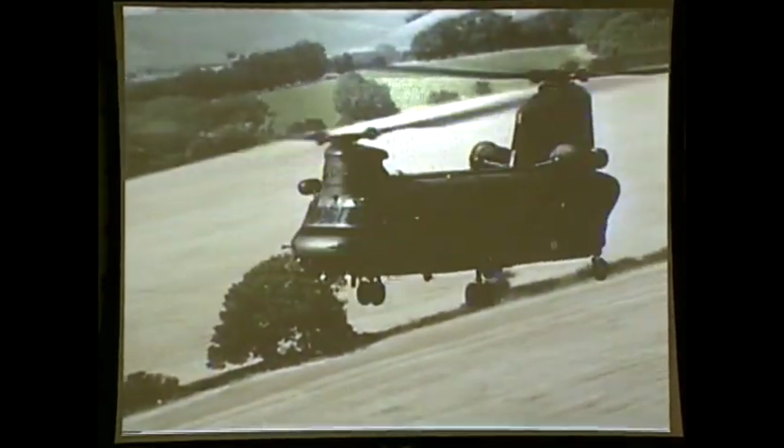Chinook is the world's most efficient, reliable, and versatile heavy-lift helicopter. It routinely does what other helicopters cannot. The Chinook flies with larger and heavier loads in demanding conditions that keep other helicopters on the ground.

The secret is in the Chinook's tandem rotor design, with its efficient size and system capabilities that can move more payload faster at a more economical rate than any other rotorcraft, even in high elevations, turbulent winds, and hot and humid climates. With its stabilizing sling load system that utilizes up to 3 external hooks, the Boeing Chinook may move a vast array of large and awkward loads to critical locations at airspeeds up to 130 knots.

A digitized cockpit management system, vibration reduction technology, and extended range fuel systems enable crews to fly complex missions with ease. Additional features that allow for water landing, operation in desert environments, and search and rescue extend the Chinook's already long list of mission capabilities. Long a mainstay of the United States Army, with a fleet of more than 400 CH-47s, Chinooks also serve more than a dozen other international military forces as their transport helicopter of choice.

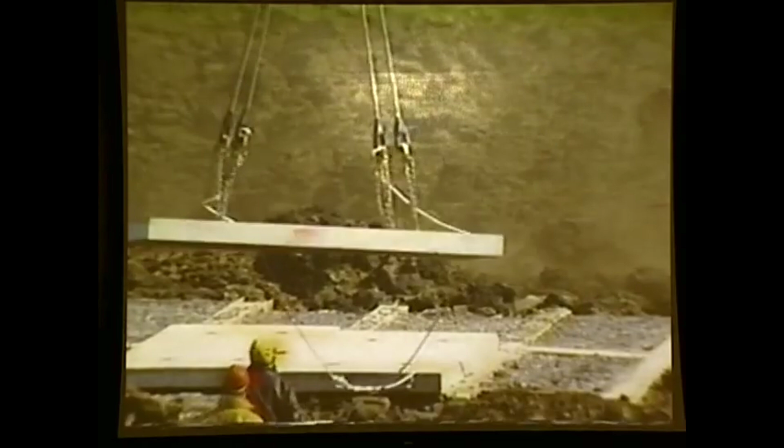In the mid-1990s, television news viewers watched a Chinook lift needed equipment into the flood-ravaged Des Moines, Iowa water plant to return that vital facility to operation for 250,000 residents. Chinooks from California rescued stranded mountain climbers on Mount Whitney, an event documented on the TV show Rescue 911. 3 cross-country skiers stranded by an avalanche near Aspen, Colorado, owe their lives to a Chinook crew. No one else could have reached the skiers and saved them from brutal cold and sure death. A Pennsylvania Chinook lifted a bridge into a state park, saving wetlands from damage by trucks.

Throughout a winter night in 1996, when no one else could fly, 4 Pennsylvania Chinooks flew in sub-freezing temperatures and blinding snow, completing heroic rescue missions to save 65 people from raging winter floodwaters that devastated small towns near Wilkes-Barre, Pennsylvania.

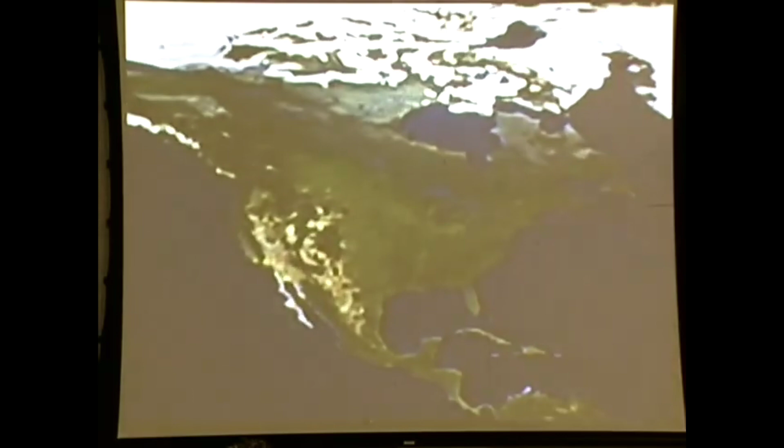Halfway across the globe, the flooding Sava River stymied U.S. Army engineers tasked with building a pontoon bridge for NATO peacekeeping forces moving to Bosnia. The engineers called for help from 4 Army Chinooks, which completed the longest pontoon bridge assembly since World War II in just 2 days. Through a record-breaking fire season in 2000, commercial and National Guard Chinooks fought dozens of blazes

throughout the U.S., dropping millions of gallons of water and retardant. A Chinook can drop up to 3,000 gallons of water or retardant mix, more than most fixed-wing aircraft, with pinpoint accuracy even in 45-knot crosswinds on the deadliest infernos and return with another load in minutes, unlike converted prop-driven bombers, seaplanes, and transports that may spend valuable hours returning to staging areas many miles from the fire line to refill

their water tanks. Chinooks perform life-saving missions lifting food, water, and building supplies into Miami, Florida after Hurricane Andrew, when storm devastation made roads impassable and survivors might have starved. The U.S. Army's lifting capabilities are not, however, limited to emergencies in the United States. U.S. Army Chinooks carried tons of food, water, medicine, and clothing to save thousands of lives after Hurricane Mitch devastated several nations in Central America.

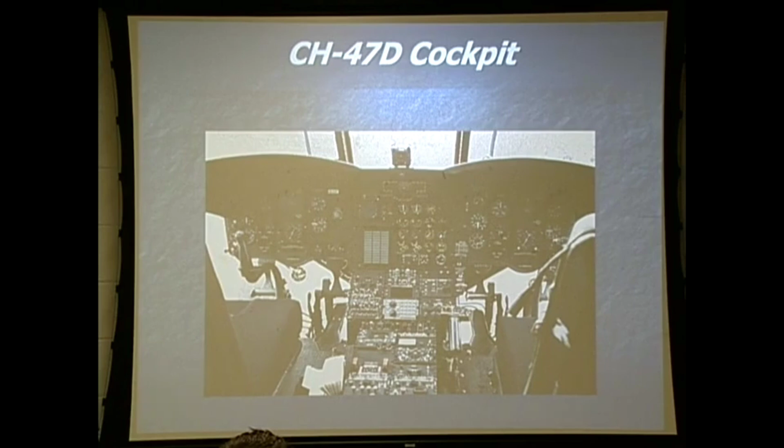The new guys, when you get into this new cockpit, be aware that one of you needs to be looking inside here and seeing what's going on, and at least one set of eyes need to be on the outside. It's too easy for everybody to look at this new equipment on the inside and forget where you're flying and fly into something. And here's what we're going to, the F model. And there's the cockpit for the F model. This is where we're going.

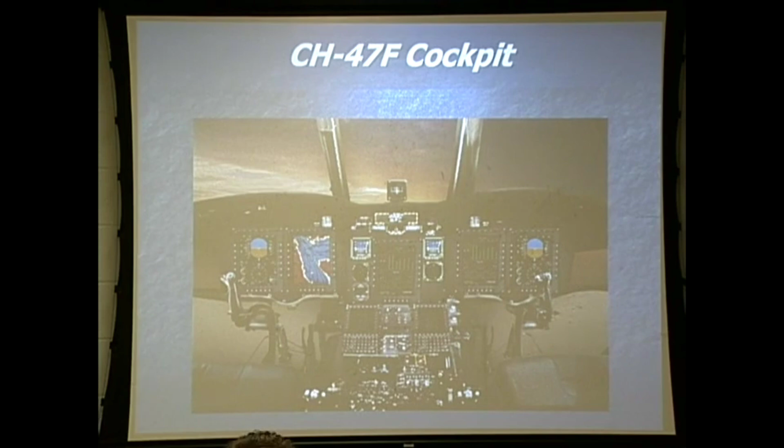Some of you will have the opportunity to come back once we start doing the differences course here and you start flying the F model. Some of you will have the opportunity to come back and go through that.

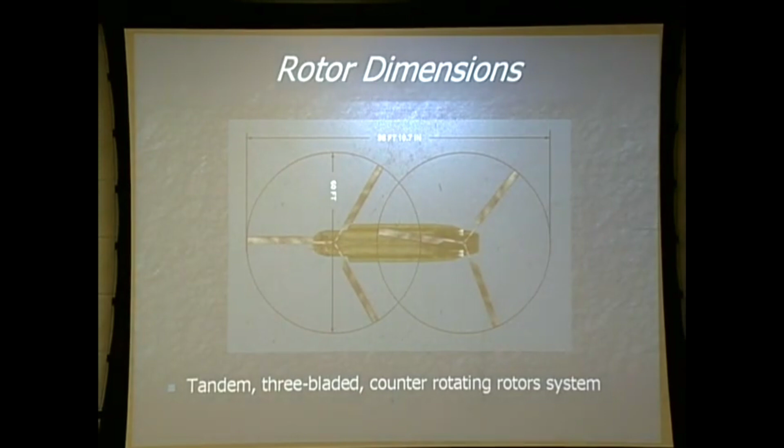LSA number 1. Describe the general operational characteristics, configurations, and limitations of the CH-47 helicopter. Rotor dimensions. Look at the rotor dimensions that we've got now. 98 feet, 10.7 inches, 60 feet wide. You've got to find a bigger parking spot. You've got to find a larger confined area to go into now.

It is a tandem rotor system, 3-bladed counter-rotating rotor system. Rotor heads are going to turn the opposite. Always remember that the rotor system is going to turn into the left side. If anybody ever asks you which way the forward rotor head turns or the aft rotor head turns, it's always going to rotate into the left-hand side of the aircraft.

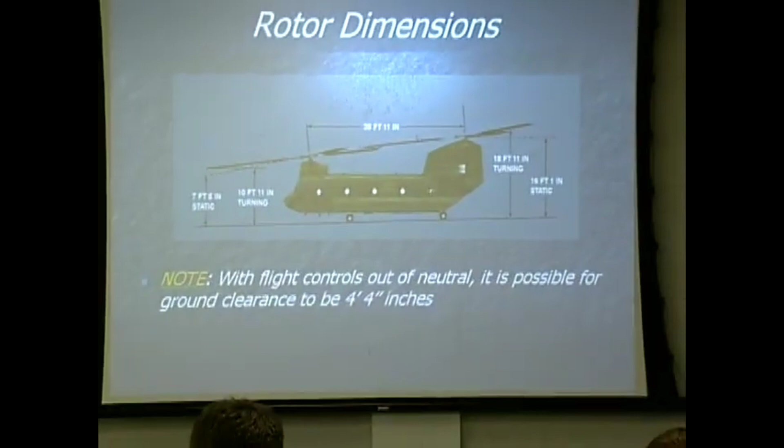Some of the other dimensions, and these are some that I really want to point out because they are very important. The 7 feet 8 inches when it's static. It actually droops a little bit lower than that when the rotors are not turning. When the rotors are turning, it can drop down to 4 feet 4 inches. That's very important. Very, very important.

Because I don't care how often you brief your passengers before you go pick them up. You tell them that their ramp is our primary means of entrance. A lot of times you're going to notice that a crew member is going to drop that front cabin door on the right-hand side, and people see that door and they want to rush up there and get in because they want to sit up front. If they're coming from the front part of the aircraft, that rotor system, 4 feet 4 inches, can dip down that far. It's not conducive. Rotor blades and bodies do not mix.

18 feet 11 inches in the back. With the rotors turning, 16 feet 1 inch static. That becomes important because you've got to get up on top of this aircraft in pre-flight. And I'm going to tell you from experience, that's a long fall. There are work platforms above the engines right there that we lower down so that we can climb up and look on the rotor head. Gotta be careful. Remember where you're at and do not step off one of those. Some more of the dimensions. From wheelbase, our wheelbase is 22 feet 6 inches.

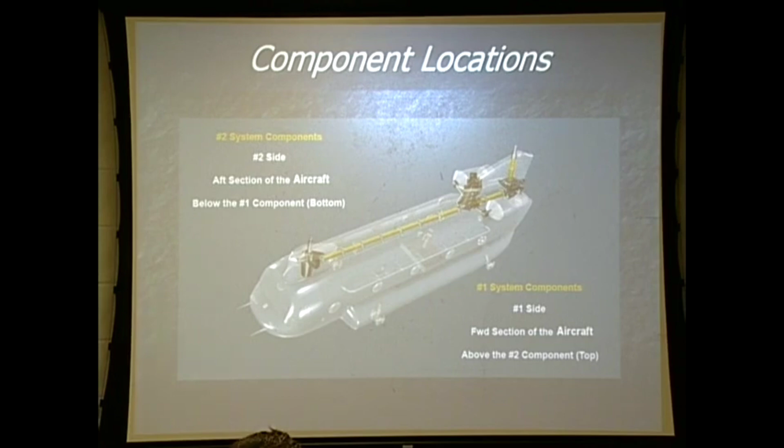Component locations. To make it easier to identify the components, where they're at, we've broken it down into a couple of different things. Everything on the left side of the aircraft will be number 1. And when I talk about these systems here in a moment, you'll see that our electrical system on one side is number 1 system. Everything on the right side is number 2. If one component's on top of another component, 9 out of 10 times, there are some exceptions, and we'll point those out in the class, the component that's on top will be number 1. The component that's on bottom will be number 2.

So now we've talked left side, right side, top and bottom, and then front and back. Our flight control system is broken down into 2 systems. Up front in the forward pylon area will be number 1 flight control system. And the back area will be number 2. Makes it easier to identify the components, makes it easier for us to write things up.

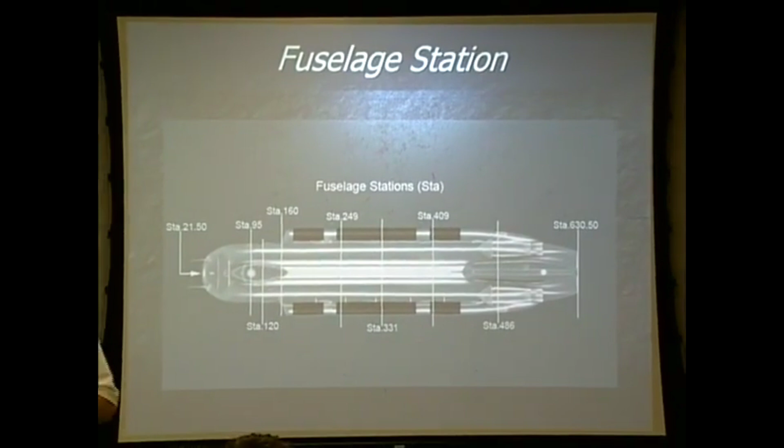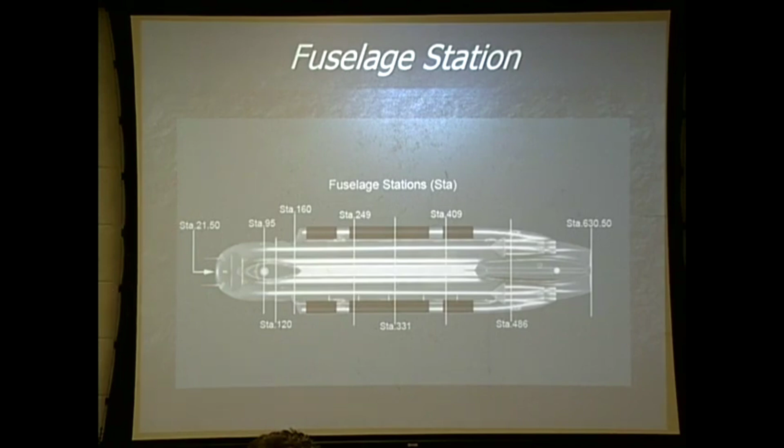Fuselage stations. Anyone here remember what a station is? What's a station number? Station numbers are numbers that we've identified as being in front of the aircraft approximately 21.5 inches. 21.5 inches in front of our pitot tube is station 0. That is inch 0. For every inch back towards the back of the aircraft, that will be a station number. So station numbers are inches back from our imaginary, we call it a reference datum, in front of the aircraft.

Some of the major components or major areas that we're going to be concerned with, from station 21.5 to station 95, for you gentlemen, that's home sweet home. That's the cockpit. From station 95 to station 120, we call that our companionway. When you walk into the aircraft on the right-hand side, and to get into home sweet home at station 95, you've got to go through the companionway. When you walk into the companionway in the middle of the aircraft, facing the front of the aircraft, on your left-hand side will be what we call the flight control closet. A little bit farther on the other side of the flight control closet will be the avionics compartment. On the right-hand side of the aircraft will be our heater compartment. And that's all between station 95 and station 120.

Between station 120 and 160 is the entranceway to the aircraft. On the right-hand side of the aircraft, there is a little cabin door that drops down that you can walk in. Also, station 160, when you get inside the aircraft and you look on the floor, you'll see a red line. We will not pull any cargo any further up than that red line at station 160.

From station 160 to 486 is the cabin area. Station 249 will be underneath, the forward cargo hook. Station 331 will be our center cargo hook. Station 409, aft cargo hook.

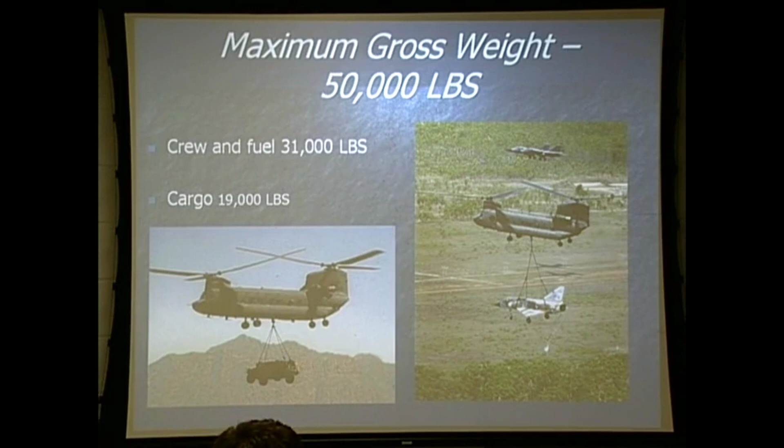Maximum gross weight of this aircraft, 50,000 pounds. With crew and a full bag of gas, the aircraft weighs approximately 31,000 pounds. And that leaves us 19,000 pounds for cargo. Again, this is our fuselage section. It's a semi-monocoque structure, but it is divided into 4 sections: cockpit section, cabin section, ramp section, and aft pylon section.

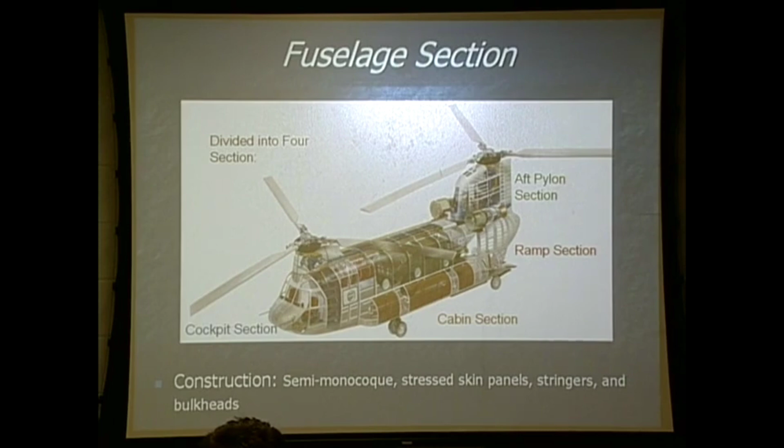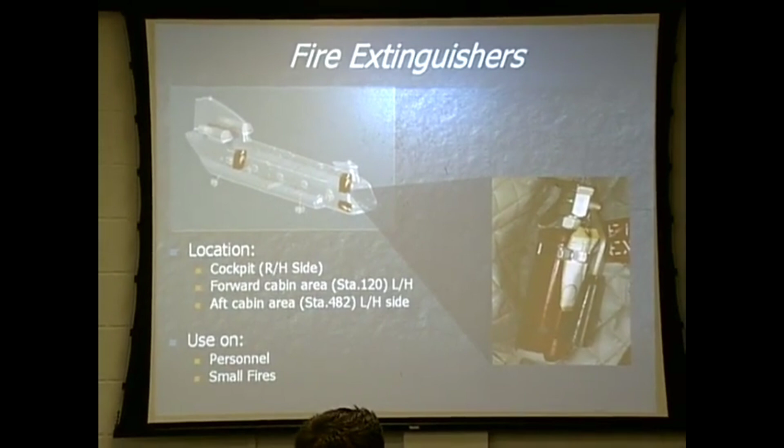All right, we're going to get into emergency equipment. Some of the emergency equipment that we have in this aircraft: we have 3 fire extinguishers. There is one located in the cockpit on the pilot's side, the right-hand side. There is one located at station 120 above the avionics closet. And then there is one in the back, station 482, in the ramp, that the flight engineer will use a lot of times when we start our APU.

These fire extinguishers are not to fight large fires or fuel fires. They are for personnel use. If the aircraft catches on fire, get everybody out of the aircraft, and if you grab those fire extinguishers and somebody's on fire, fight that individual. Do not try to fight the aircraft fire. This aircraft has a lot of magnesium in it, it's going to go quick. We can replace the aircraft, we can't replace individuals.

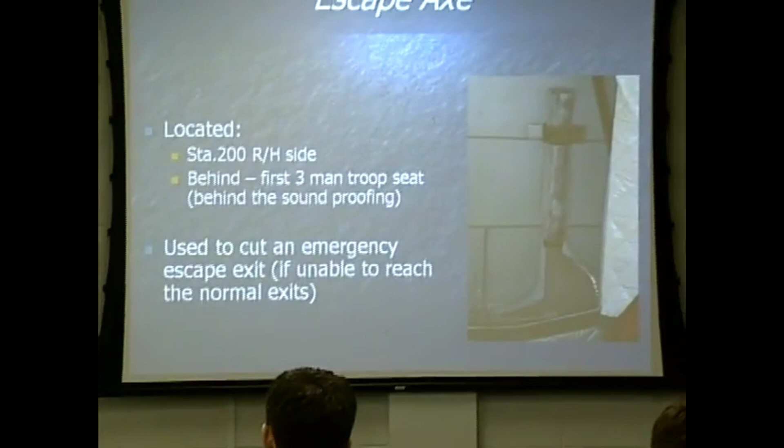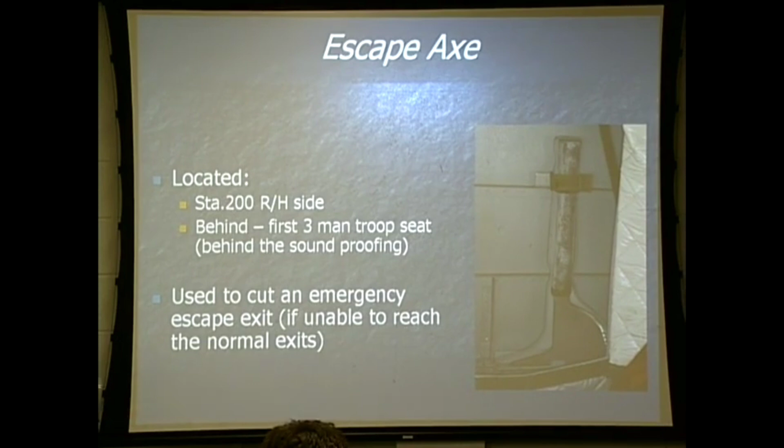Emergency escape axe. In the unfortunate event that we have to cut ourselves out of the aircraft, we have an emergency escape axe. It's located at station 200 on the right-hand side. When you walk inside the cabin door up front on the right-hand side, the first three-man troop seat immediately to your left will have this emergency escape axe. When you pre-flight and it's on the checklist, just look to make sure it's there. It's a piece of steel, it's not going anywhere. If you pull it out, you stand the chance of dropping it, breaking a toe, or putting a hole in the aircraft floor.

Emergency exit lights. These lights are designed to illuminate in the event you have a hard landing of 3 Gs or more. And at nighttime, they give you a valuable asset of being able to tell where the exits are on the aircraft. When I walk into the companionway or the cabin entrance on the right-hand side, immediately on top of that door will be an emergency exit light. Right across the cabin area on the other side, there will be a panel, and there will be a light above the top of it. And then in the back, the ramp area by the auxiliary power unit, there will be another light. Again, when we have a hard impact, these lights will illuminate and show us the exits.

If I've got to escape out of the aircraft and it's nighttime and I can't find a flashlight, I can reach up, pull it out and open it. As long as that red handle is pulled open, they will be used as a flashlight. You can activate them from the cockpit. You can arm them, disarm them, and that's one of the things you're going to have to work out with the checklist, because if they're not properly turned off with the checklist and you leave them armed and the battery's plugged in, it will drain our battery down because it's constantly recharging the batteries on the inside of it.

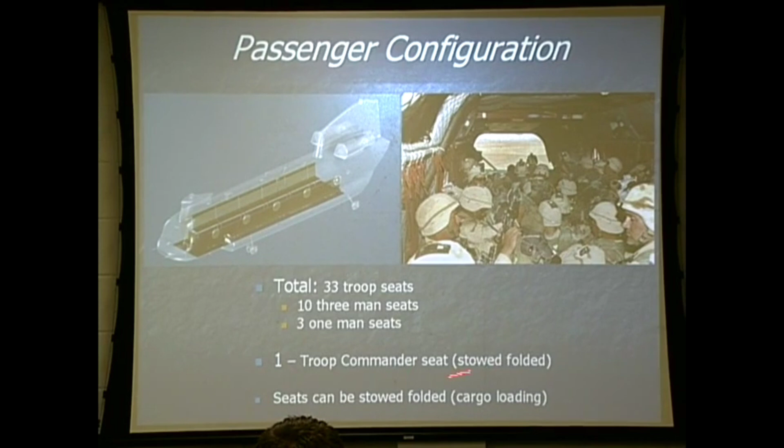Passenger configuration. There is one seat in the companionway, the troop commander's seat. I want to give a little bit of caution about how it works. It folds down, hinged on one side. There is a handle in the front of it. You pick it up, and it's supposed to lock in on some formers on the flight control side of the companionway. You push down on it, and a lot of people make sure it's locked and they crawl over it. We can pull our seats up without having to pull them out to bring our cargo, like our Humvees, on the inside.

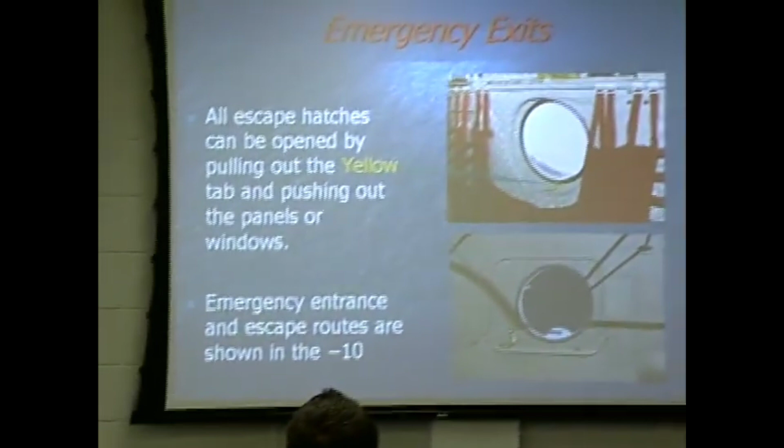Normal emergency and rescue entrances and exits. On all of our windows, there is a yellow tab. All of the windows in the aircraft are an emergency exit. You pull on the yellow tab, it will pull out an inner liner around that rubber ring, and you just push the window out of the way. Same goes with the window that's in this big panel and with the panel itself. It also has a yellow pull tab. When you've got somebody as big as I am who can't fit through that little window, you push that big panel out and they should be able to get through.

This panel is on the left side of the aircraft. When you walk in from the right side through the cabin entrance, this is the one that's right straight across. On the inside of the aircraft, that second emergency exit light that I talked about will be just right above that panel. Those are your emergency exits. Also, in the cockpit, your doors are jettisonable. You'll have handles in the cockpit. You'll pull on them and they'll fall away.

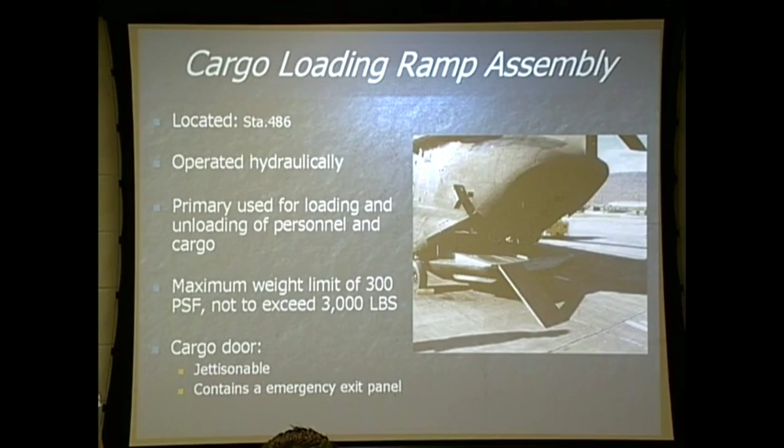The cargo loading and ramp area is also an emergency exit. The ramp is operated hydraulically. It comes up hydraulically. We'll talk about this during our utility hydraulics class. We use hydraulic pressure to bring it up, but it free falls down. It can be used as an emergency exit. On the ramp, we have that 300 pounds per square foot limit that we have to be concerned with, but on the ramp we've also got to be aware that in a total area of the ramp we cannot exceed 3,000 pounds. Inside the ramp there is a door.

When the ramp comes up about 4 to 6 inches from getting to the up position, it will stop. This ramp door will shoot out, and then the ramp will come up and it will seal. You'll hear me and probably Tom refer to it as we go through this class as the ramp tongue, but it's called the ramp cargo door. It also has some escape panels on it. There will be a little yellow panel instead of a window in the middle of it, a yellow panel with a pull tab. You can pull it out and push that panel out. Also, on the bottom of that tongue when it comes out, there will be a big yellow handle. If that little panel is not big enough for me, I can pull on that yellow handle. If I'm right side up, the door will fall away. If I'm upside down, I can pull that handle, then I'm going to have to push the door away. But it is an emergency exit.

Our main cabin entrance door up front is broken down into 2 sections. The height, 66 inches, you really don't have to worry about that because you're stepping up and into the aircraft. You shouldn't be bumping your head. It's used as, it says normal exit and emergency exit. Again, try to brief whenever you pick up passengers. Do not come in from the front side of the aircraft. If they think they can start coming in up here as your rotors are turning up front, it could lead

Been there, done that. Dropped one in the middle of a parade field one time when I did that. Fortunately, my door went down, but it can go up and go through the rotor system. So we must slow down to 100 knots before closing that door.

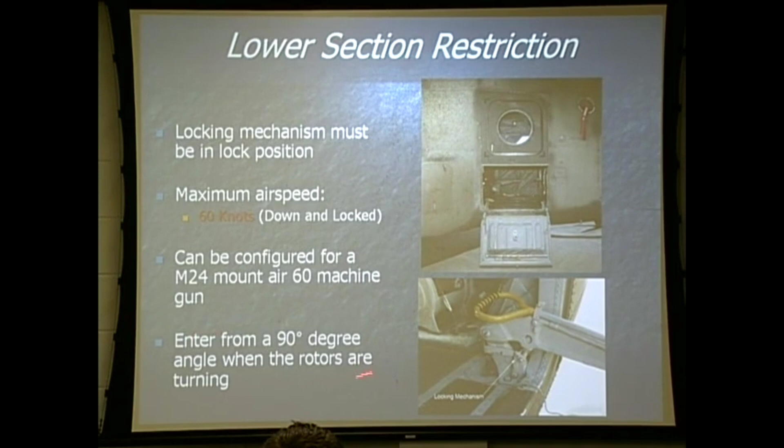The lower door, the restriction. To fly with this door down, or to even lower it in flight, I don't know why we would want to be doing that, but to fly with it down, you cannot exceed 60 knots, and it must be locked down. Once the door is lowered down, there is a little lock mechanism here on the side. Pull up on the back side of it, push it forward, and it will lock it down. And if they do enter from the aircraft, passengers are going to enter, make sure they come 90 degrees off the nose of the aircraft.

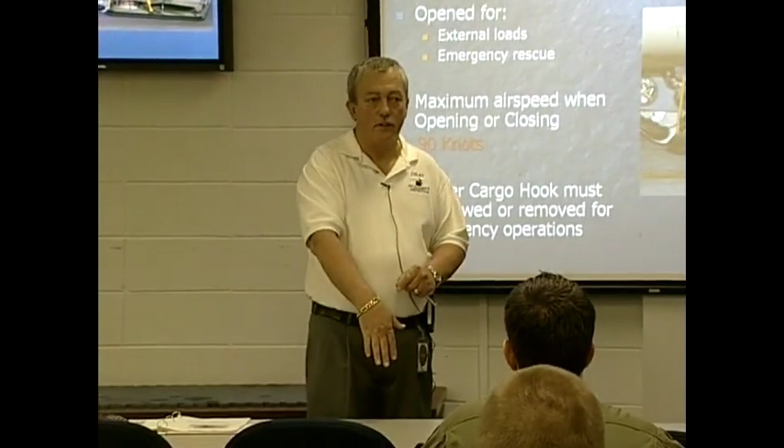All right, another limitation that we have to be aware of. So far, we've covered the upper cabin door restriction. Closing it was what? Less than 100 knots. Flying with the lower cabin door down was 60 knots. Now then, this door that is on the bottom of the aircraft, we have another limitation that we have to be concerned with, 90 knots. Anytime that this door is in transition, we cannot be exceeding 90 knots. If you're doing it in flight, you've got to slow down below 90 knots or that door will leave the bottom of the aircraft.

As long as it is fully open, there are some rubber mounts here on the front part of it. It will swing up a little bit farther and back up against the aircraft with those rubber mounts. As long as it's all the way open or all the way closed, there are no restrictions. But they have put a restriction in there about the 90 knots. It's one of the things to look for on pre-flight before you go out and fly. And if they've got this door open, which 90% of the time when you fly, make sure that those rubber mounts are up against the belly of the aircraft. Because if they're back 2 or 3 inches and you exceed this 90 knots, the strain on the motor, the gears will give away and that door will fall down and it will fall and leave the aircraft.

External cargo hooks. We've got 3 of them. Our forward and aft cargo hooks operate off electricity and they operate manually. Our center cargo hook will be operated hydraulically. Center cargo hook, rated at 26,000 pounds. And again, we're going to airframe restrictions with this and the strength of the hook, because we can, with the engines that we've got on this aircraft, we can lift anything. It's mounted at station 331.

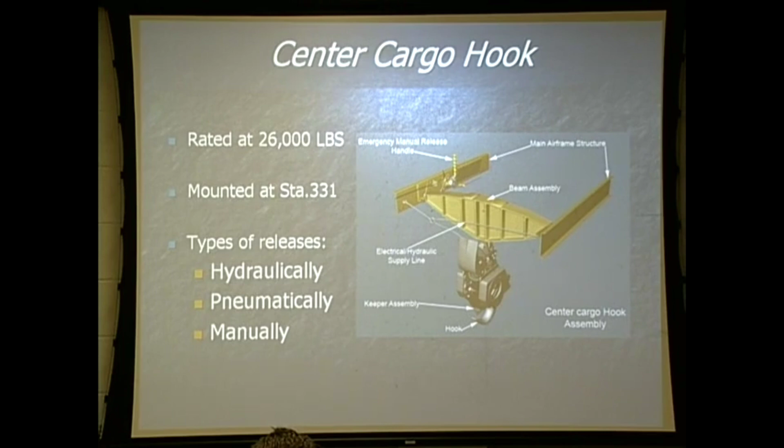There are 3 types of releases. First of all, normal release. We want to release it hydraulically if we can. If it cannot be released hydraulically, we would try to blow the air charge that's inside of it and we will release it pneumatically. If that fails to work, we have a manual release that releases all 3 hooks at one time. That will be our last resort of releasing the load.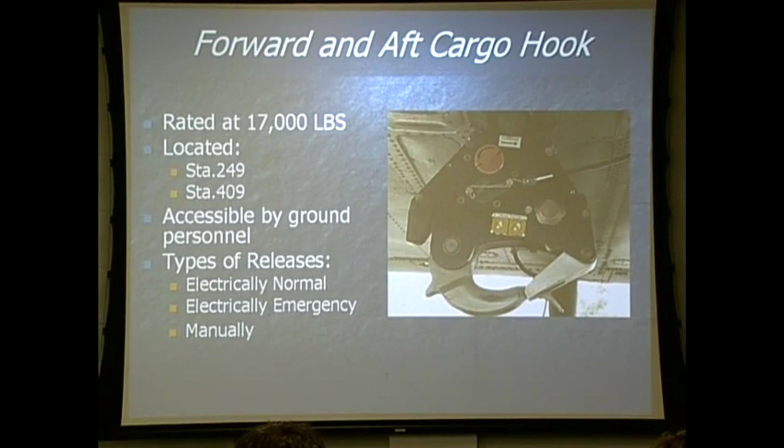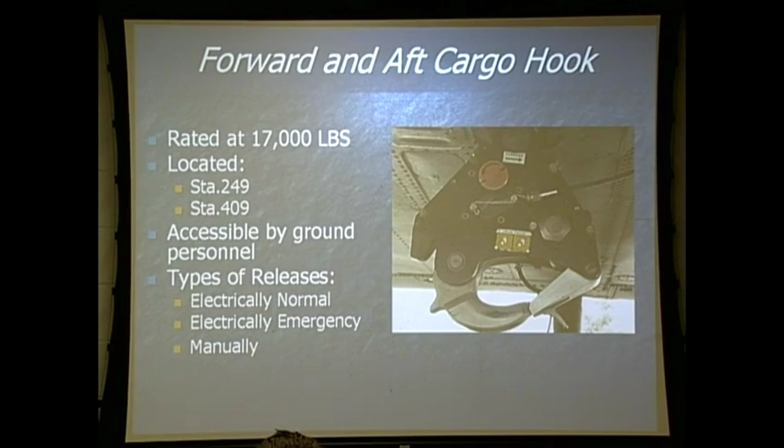Our forward and aft cargo hooks, rated at 17,000 pounds apiece, located at station 249 and station 409. These are accessible by ground personnel only. Again, this one is not hydraulic. We've got electrical normal release, and then we've got it on another bus, electrical emergency release, and then again the same handle that releases the center cargo hook releases the forward and aft hook manually. Tandem loads, maximum is 25,000 pounds. Remember, what did I say the forward and aft hooks were rated at?

17. We can't add that together and say 34. We have to be aware of the fact, and it happens occasionally, that one of those slings may break, and then it's going to swing forward. That 25,000 does exceed that 17,000 pounds, but it won't rip it out of the bottom of the aircraft.

When we go into the water, normal operations, we are limited to be at 36,000 pounds. Emergency rescue operations, we can go in the water at 46,000 pounds. Flotation time, 30 minutes max. That's with the rotors turning or without the rotors turning. I've got to pull it out of the water in 30 minutes.

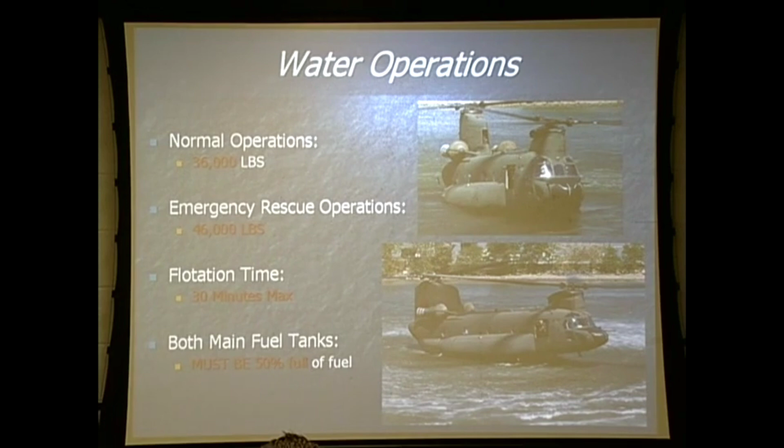If I've got to be in any longer, I'll pull it up out of the water, let it drain whatever little bit of water gets into the airframe, let it drain out, then put it back in. But I do not need to exceed that 30 minutes of flotation time. Both main tanks, and this goes for the main tanks only, must be at least 50% full. The reason being, we're not worried about fuel getting mixed in with water.

Our fuel cells on the outside are fiberglass shaped honeycomb material. On the inside of it are our fuel bladders, or our bags. Inside the main tanks, we have 3 fuel probes. We have 2 fuel pumps. Water is allowed to get in between the fuel cell and the fuel bladder.

If that water gets in there and you are less than 50% full, that bladder starts to compress on the inside between the cell and the water, starts to push in on it. You'll start interfering with your boost pump operations. You could knock some lines loose on the inside, develop fuel leaks. So we must be at least 50% full of fuel on the main tanks.

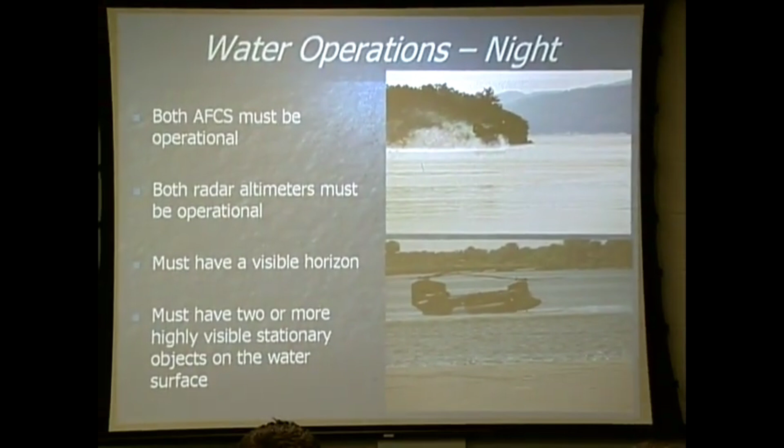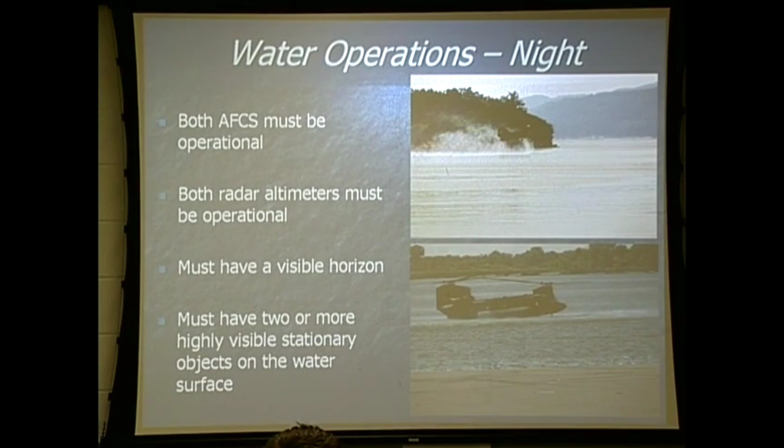Water operations at nighttime. Yes, we can put it in the water at nighttime. I've never had the opportunity to do that. But we've got to meet some requirements. Both AFCS must be operational. Both radar altimeters must be operational. Must have a visible horizon, and must have 2 or more highly visible stationary objects on the water.

These little latch black and white indicators here: if I get a chip light on a number 1 engine, number 2 engine, or a transmission, if it flickers on the master caution panel in the front, this is going to latch and it's going to stay lit. So I don't have to go searching for that flickering or that big piece of chip that may be floating in a transmission anywhere.

In the cockpit, on your gauges for the transmissions, you've got selector switches that can tell you which transmission oil pressure I want to monitor at that time. But we go into the scan position. Scan is looking for the lowest or the highest pressure at that time.

Once the master caution light illuminates, it's not going to tell you which transmission. I can take the time if I want to go through the selector switch, find out which one it is, and then start initiating the emergency once that light comes on, but some of the emergencies are different. Or I can immediately ask the crew chief. I can tell him I've got a transmission oil pressure light. Which transmission is it? And he can go back there and tell you exactly which one it is.

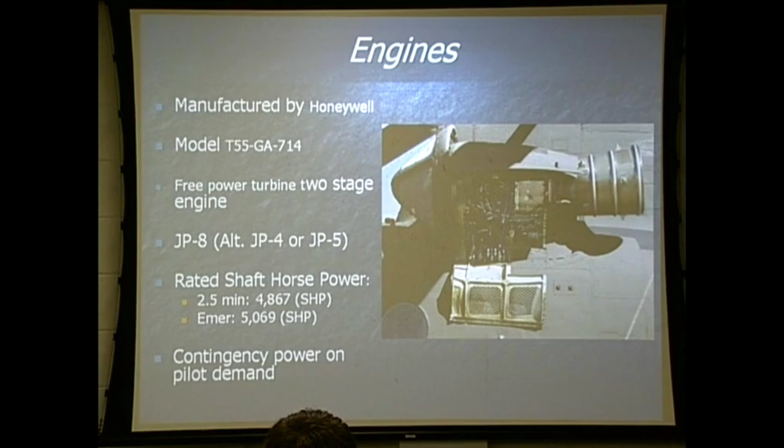We'll talk about the engines a little bit more in a minute, but we've gone computerized with the 714s. We'll talk about a FADEC system. It's a system, it's not a component. FADEC will consist of a DECU, nothing more than a little computer telling the engine how to operate, when to operate, and it monitors it for faults. And then we've got the HMA, which will be our electrical fuel control.

A little cutaway of our engine on the inside. Blue indicates N1 and red should be N2. As you can see, as we suck air in for our N1 inlet turns one way, and then our N2 turns the opposite way. That counter rotating keeps that engine from rolling off the side of the aircraft. But as we are producing power with our N2 section, it's free turbine, and then there is a shaft that rolls through the front portion of it up front.

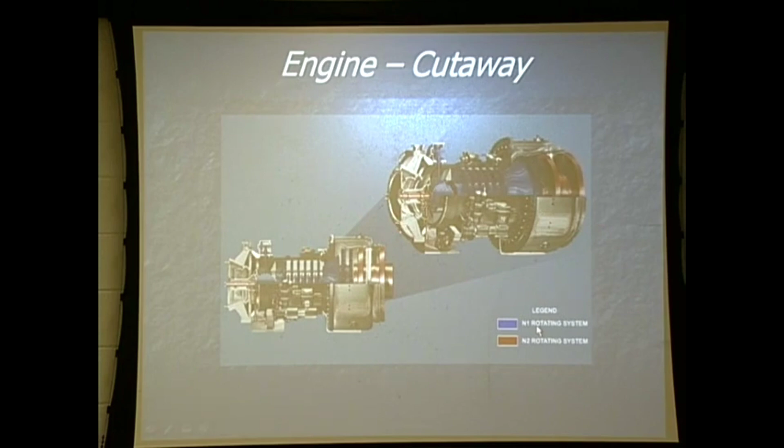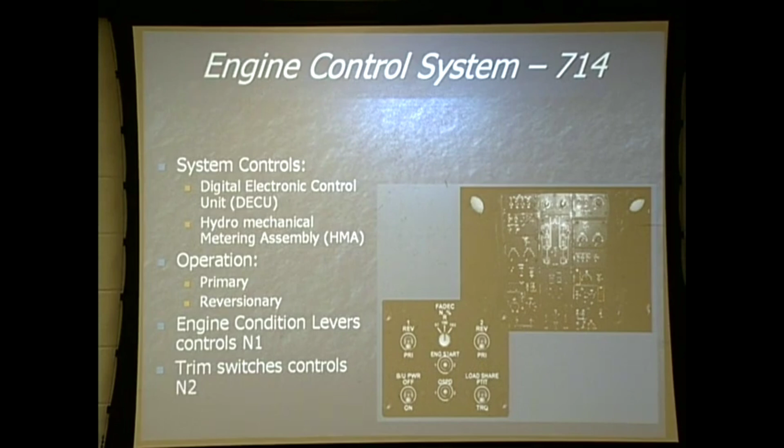That's where we take our power we're producing out of the back, run it back through the inside of the engine, and it's mounted to our nose box transmission that we'll talk about in a moment in front of the aircraft, and then we distribute the power out a couple of different ways. Our engine control system, what I was alluding to a while ago, is called FADEC. FADEC is a system. It consists of a digital electronic control unit, a DECU, a hydro-mechanical metering assembly, that's our fuel control now. Our transmission and drivetrain system.

Again, we've got 5 transmissions. First 2 transmissions that we're going to talk about are our engine nose box transmissions. They take the power from that N2 shaft running through the center of the engine, and they take it and turn it 90 degrees to our combining transmission. Inside of there is a sprag clutch. Again, it allows us for auto rotation. It prevents the rotor system from driving our engines. We always want to be able to drive the engines to drive the rotor system. But if we lose one of our engines, it allows that other engine to completely disengage from the system. It won't drag the rotor down.

Combining transmission. This one is one of the most important transmissions that we've got. It takes the power from both engines, receiving it in on the side, and again, it distributes it another 90 degrees, forward and aft. On top of the combining transmission is a reservoir. This is where the oil will be stored for our nose box transmissions. Also on top of it are 3 coolers. The cooler for the combining transmission itself and the cooler for each engine transmission.

The aft pylon area here in the front part of the combining transmission, there are 2 cowlings that are on the front of it. If you hear myself or Mr. Borneman refer to clamshell doors, those are what we call the clamshell doors. Open them up and you can look inside, because in the back side of the top part of that are some of the hydraulic components that I know that I will be talking about.

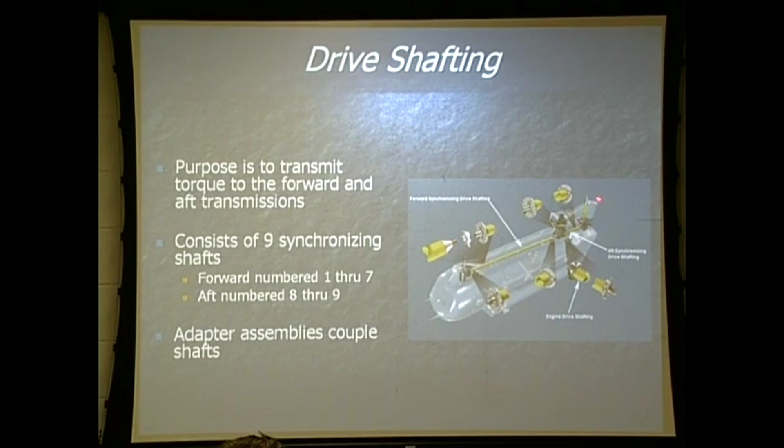The drive shafting area in this aircraft is very important. It will not take long for it to cut itself in half. When you pre-flight the top of this aircraft, look for FOD around those drive shafting. One other component that I want to point out, the aft vertical shaft. It has transmission characteristics, but it is a drive shaft. It has oil pressure switch on it. It has a chip detector on it. It's a drive shaft. It's where we're taking our input from our aft transmission and turning our aft rotor system. You really don't know where to classify it, either as a transmission or a shaft, but it falls in between them.

Our forward transmission area. It provides our mounting for our upper controls, our upper dual boost actuators, our flight controls. And our number 1 flight boost pump will be located on the bottom of the forward transmission. Has our swash plate on it, and it's located in the forward crown.

When you walk up to the top of the aircraft and you pre-flight it, you've got 2, we call it the doghouse cowling, but there's a door on either side. You can look inside and pre-flight it. And again, our number 1 flight boost pump is located on the forward transmission. That goes to that front and back thing that we talked about earlier.

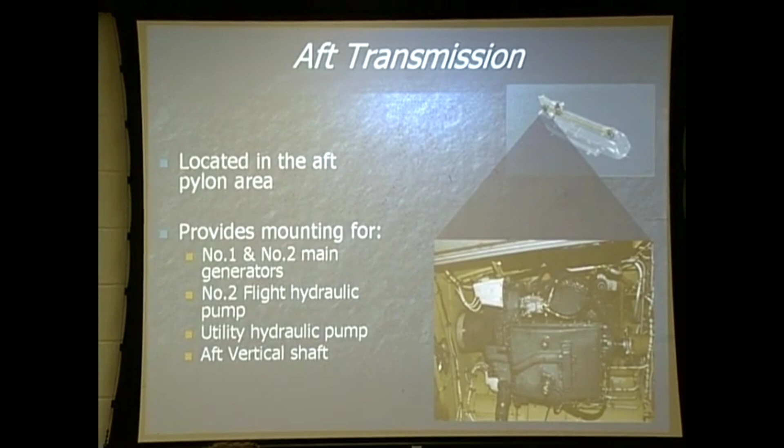Aft transmission. A few more components are located on the aft transmission than they were on the forward transmission. Our number 1 and number 2 main generators are located on the aft transmission. Our number 2 flight boost pump is located on the aft transmission. And then our utility hydraulic pump is located on the aft transmission. And again, like I just mentioned a while ago, that aft vertical shaft fits down on top of the aft transmission to take that rotation from the aft transmission up.

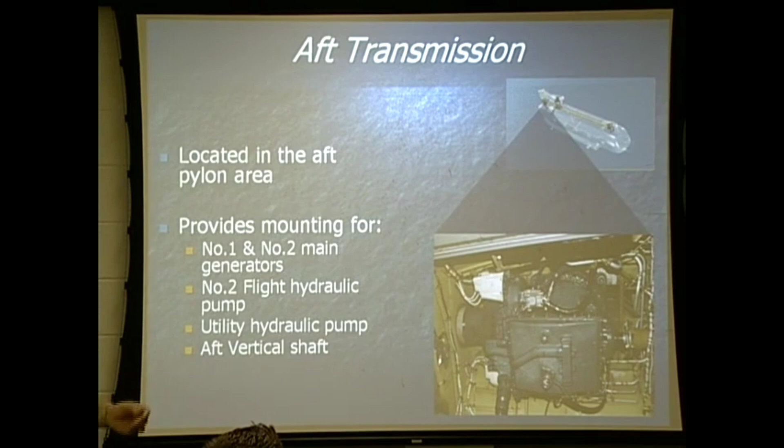One of the things that we've got to be aware of: I told you the forward transmission was mounted with our number 1 flight boost pump. I told you that on the aft transmission the number 2 flight boost was located. That follows that rule that we talked about earlier, front and back. Now you're going to be out on the flight line and somebody's going to ask you, what pump is that? Well, if I was looking at that right side up, that pump is going to be on the number 2 side. But that's not my number 2 flight boost pump. That's my utility pump. The number 2 flight boost pump is on the number 1 side of the aft transmission.

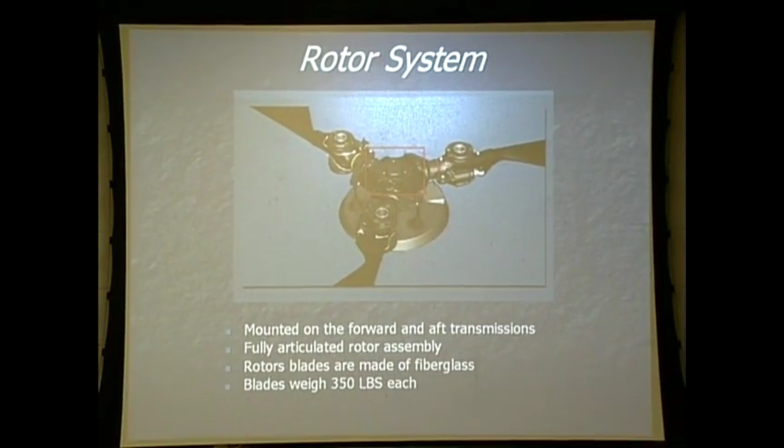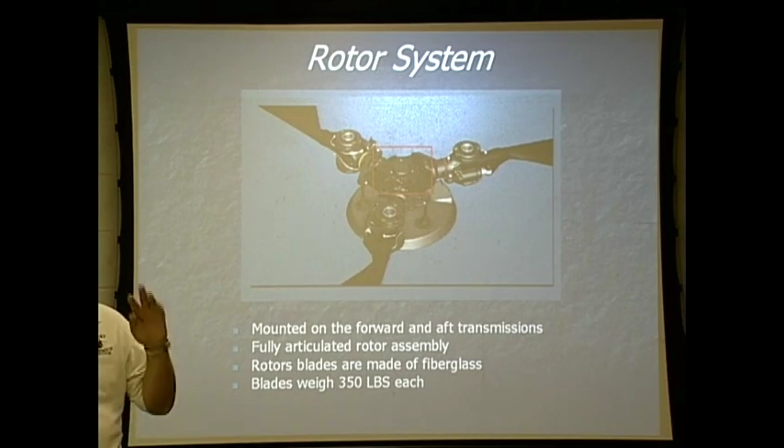Our rotor system, fully articulated. Our rotor blades are made of fiberglass. Each blade weighs 350 pounds. As we go through our flight control classes, you're going to find out that we have at least 4 pumps in our flight control system. Or, as a matter of fact, we got 4. Unlike the TH-67, OH-58, UH-1, you lose your hydraulics, you can still fly those aircraft. If we lose the hydraulic system in this aircraft, you're not going to move the controls.

How many rotor blades we got? 6. 350 pounds apiece, that's heavy. Each rotor system weighs anywhere from 400 to 600 pounds, or the rotor heads themselves, that's a lot of weight to move. But our rotor systems, again, fully articulated. What does fully articulated mean? It means that we control the pitch change, lead and lag, and the flap on our rotor system.

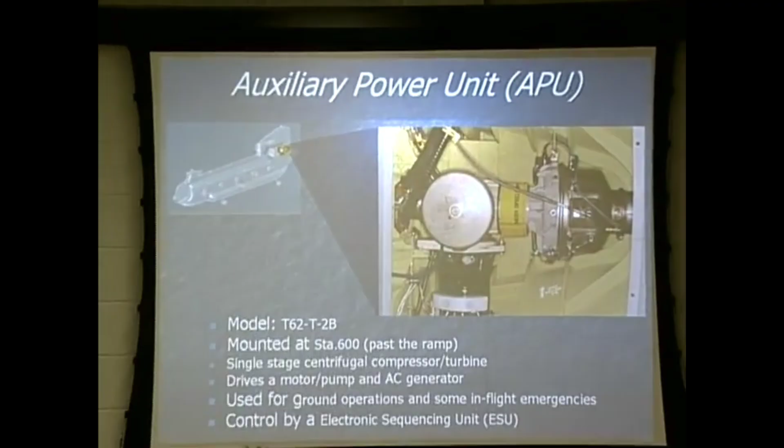Is our auxiliary power unit, our APU. It drives a motor/pump. Mounted on the front of the APU is a utility hydraulic motor pump. I need it to be a motor when I start the APU, but just as soon as I get the APU online, it turns into a pump. It will be my utility hydraulic pressure until I get my transmissions turning. Once I get the transmissions turning, then I can cut my APU off and use my utility hydraulic pump. That means that it's a backup. If I lose that utility hydraulic pump, crank the APU up and I've got utility pressure again, hopefully.

It's also got a 3rd generator on the back. I use this generator when I crank the aircraft. It runs fine. It operates everything perfectly. So those two generators I have mounted on the aft transmission, if they both fail in flight, I know I've got another backup there. There is redundancy in this aircraft. There's backup after backup after backup. We use it for the APU for ground operations and, like I said, for some in-flight emergencies.

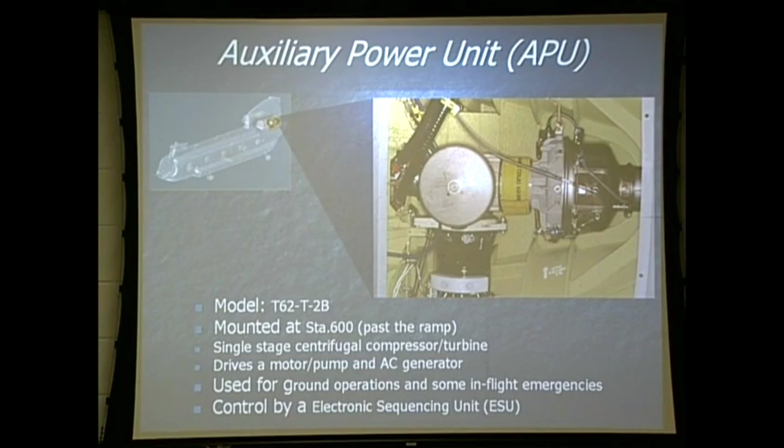It also is going to be controlled with a little white box called an ESU, electronic sequencing unit, just like the engines were, with a DECU. It controls the start. I hit the start switch, it goes through its sequences, it monitors the start for over temperature, pressures, and will shut it off any time that anything is wrong.

Our electrical system on the left-hand side of the aircraft will be my #1 system. And the electrical pod up front, in front of the fuel system, you will find that there will be a generator control unit in there for our #1 generator. And our batteries also located inside there, transformer rectifiers. But everything that is on the #1 side, or on the left side, is #1.

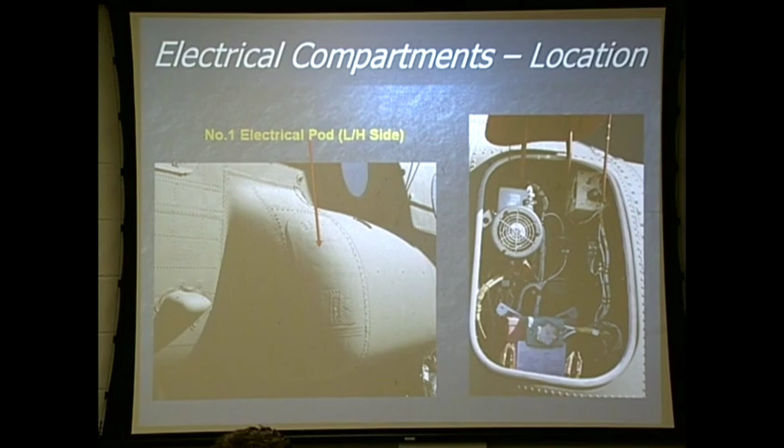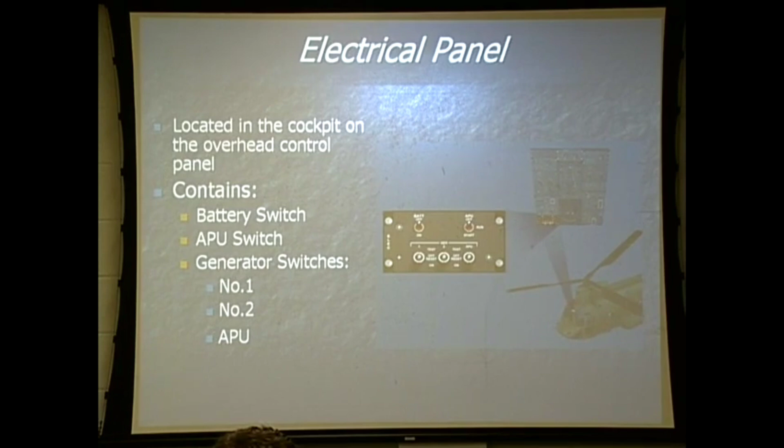Our electrical panel in the cockpit, very simple panel. Battery switch, off, on. APU switch, that's where we start our APU, 3-position switch. And then we've got our 3 generators. Our main generators, located on our aft transmission, 2 of them. They are 40 kVA generators. They are oil cooled. 2 of them, again, 40 kVA, oil cooled. Our next generator is the 20 kVA generator mounted on the APU. Charlie model and below, this was our generators. We had 2 of them mounted to the aft transmission. As you can see now, you've got power for days.

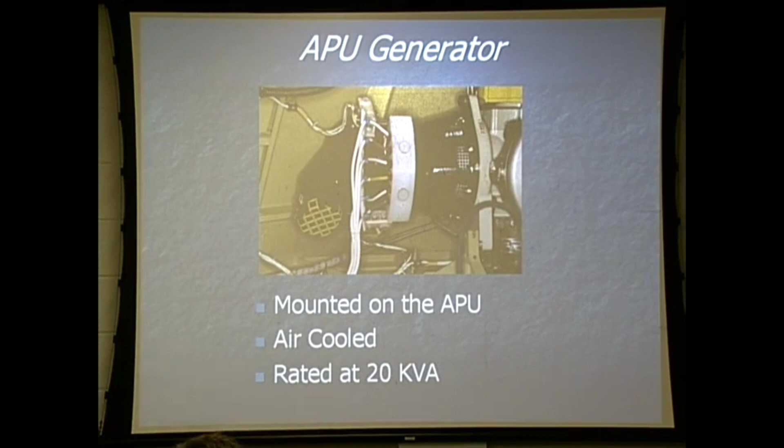We went from having two 20 kVA generators and everything operating fine. Now we've given you two 40 kVA generators. We do not have a lot of electrical problems. But this is your backup. This one is not oil cooled, it'd be air cooled. Our DC system, again, it's broken down in the left-hand, right-hand side, #1, #2 side.

Transformer rectifiers. Purpose of a transformer rectifier is to do what? AC to DC. Again, we have AC generators in this aircraft. We need to convert it back to DC. Most everything in this aircraft is AC operated, but DC controlled. That's meaning I'm using my switches to open and close relays and let the AC power flow through.

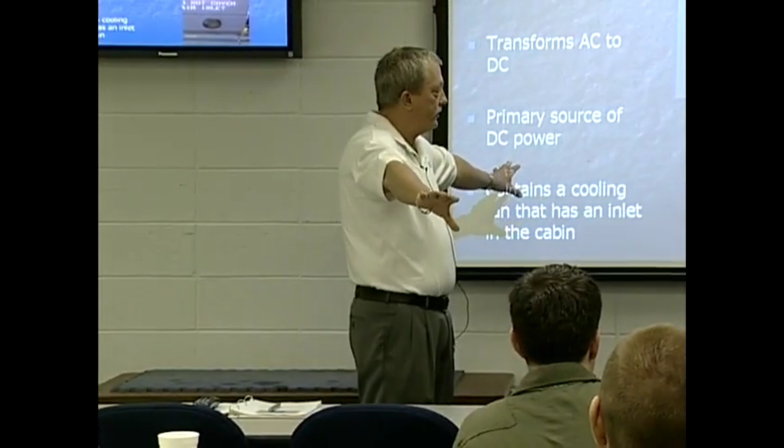One of the things I want to warn you about with our transformer rectifiers, there's one on each side in the little compartments in front of the fuel cells. But on the inside of the aircraft, behind the first 3-man troop seat on the left side and the right side, is a screen. It is a big problem with people throwing their helmet bags behind the troop seats while you go fly. These fans, that's where they suck the air in to keep our transformer rectifiers cool. Do not store anything behind the front 2 seats on either side of the aircraft. If a transformer rectifier gets hot, then you're going to need to know what your transformer rectifier emergency procedures are.

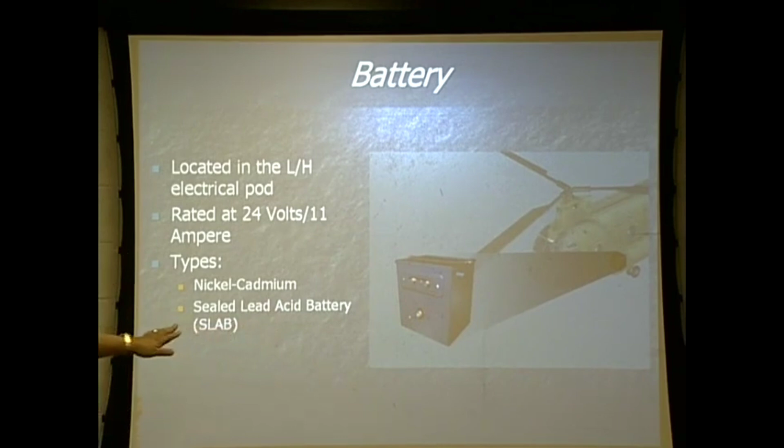Batteries. There are 2 different types of batteries. We got the pink batteries out there as the slab batteries, and then we got the blue batteries that are the NiCad batteries. When we are converting again from our 712s to 714s, they are doing the change out, taking the NiCad batteries out of the system. If I have a NiCad battery in the aircraft, also on the left-hand side in that #1 electrical compartment, there will be a battery charger.

This was put in the Delta model Chinook to try to trickle charge the NiCad batteries because we were having a problem with thermal runaways. This was to help trickle charge it. It was to monitor it. And with the 712s, if you got a battery malfunction light on the caution panel, then you must know your emergency procedures, reset circuit breakers for the battery charger. But it monitors for over temperature in the battery, cell imbalance.

External power. If you're going out to your aircraft in the morning, you see that you've got an AGPU hooked up to your aircraft, just turn around and go back the other way. We do not need this for anything. I spent 21 years in aviation in Chinooks. I used it 1 time, and that was to convert from the old hydraulic fluid, non-fire resistant, to the fire resistant hydraulic fluid. It was easier to flush the system that way. But we do not use it.

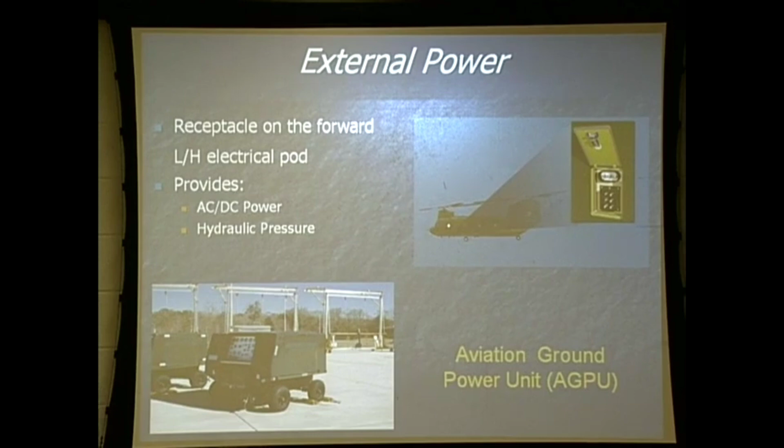It can be used for AC power, DC power, or I can use it for hydraulic power to do any troubleshooting that I need to do with the aircraft. But we do not need it for anything else other than troubleshooting. And again, if it's there, your aircraft's broke.

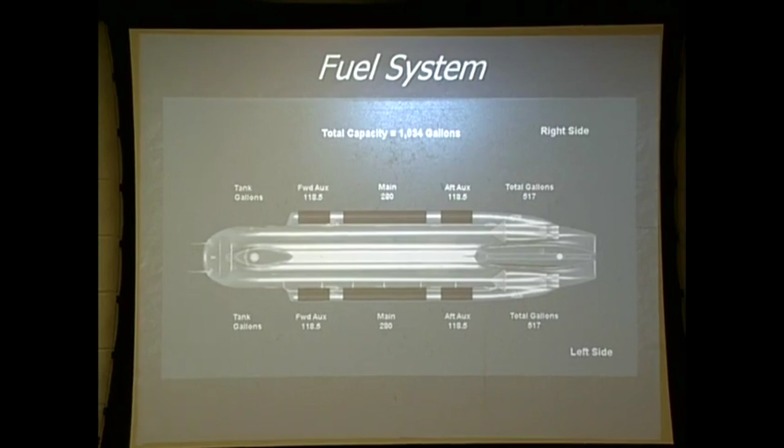Our fuel system. Again, we got 1,034 gallons. We've got 6 fuel cells, 2 forward aux, 2 aft aux, 2 main tanks. Our aux tanks always empty out into our main tanks. Our main tanks feed our engines. The left side main tank will also feed the APU. The right side main tank will feed your heater.

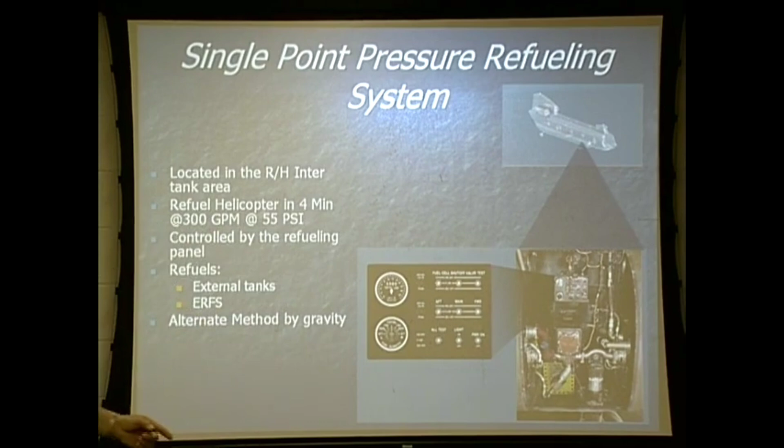Single point pressure refueling. Now supposedly we can refuel the aircraft in 4 minutes at 55 psi. Remember the 55 PSI. But if you do cross-country flights and you stop at a civilian airport, be aware that their pressure may be higher than 55 PSI. If I try to refuel this aircraft any higher than 55 PSI, I will ruin the airframe of this aircraft. Once those bladders start overfilling, they're going to crush the stringers and the formers on the inside of the aircraft. I can refuel my external tanks, the ERFS, with a single point pressure refueling.

Utility hydraulic system. A lot of things work off of this. Once we get in the air, there's not really anything we use off the utility system. But my utility system, when we go through that class, it leads a lot into my flight control system. Our hydraulic reservoir, it's going to be located in the aft pylon area.

Between the number 2 engine and the aft pylon, when you go out to pre-flight every day, there will be a panel opened up. Inside that panel, we call it the hydraulic panel, you'll see our utility reservoir on the right, immediately on the right-hand side. You'll see a number 2 flight boost reservoir in front of you and several other components. The reservoir is where we store and cool our fluid till we need it. Our utility pressure control module.

If I was standing in the back of the aircraft, facing towards the back of the aircraft, standing underneath the 8-9 drive shaft, I look up to the right-hand side. That will be my pressure control module. There are 5 solenoid valves on the top of that pressure control module. Those 5 solenoid valves allow me to control the flow of fluid out of this, from the pump to all the systems that it needs to go to.

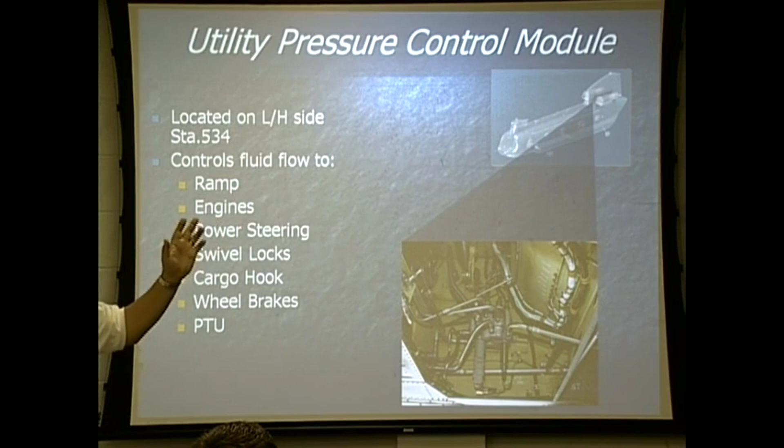So this gives me the ability that if I have a leak in flight in certain areas, I can start isolating those leaks and continue my mission. But we've modularized everything, and it allows us to control those a little bit better. And those are some of the components that it controls the fluid flow to.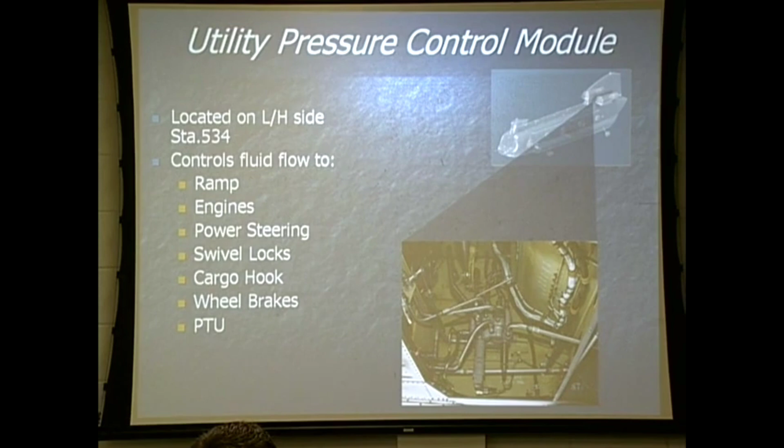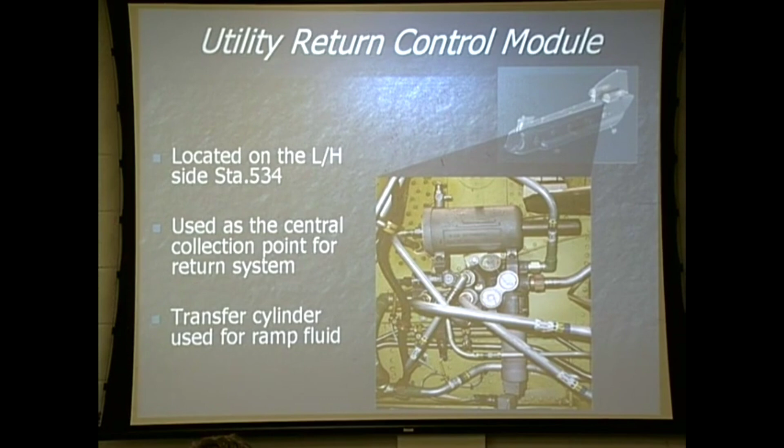On the opposite side of that, still standing underneath the 8-9 drive shaft, look over to the left-hand side, is our return control module. After the fluid goes to all the components that it needs to go to, this is the collection point where it gets filtered again prior to going back into our reservoir. There are 3 filter buttons on this return module. On the bottom, there's a filter button telling me when the filter gets clogged.

This little button here that I can point to on my slide, that's a pump fault button. That's for my APU pump, that motor pump on front of the APU that I talked about. If it starts to go bad, this button will pop, illuminating the light on my maintenance panel, and then I have an emergency procedure for that.

And one that we can't see that's tied in behind these lines is another pump fault button. It's for my utility hydraulic pump. If it starts to fail, it will illuminate a light, and then emergency procedure from there. Again, if those things pop telling me that the pump's about to fail, it could be 5 minutes, it could be 5 years. This little thing on top of the return control module is called a transfer cylinder.

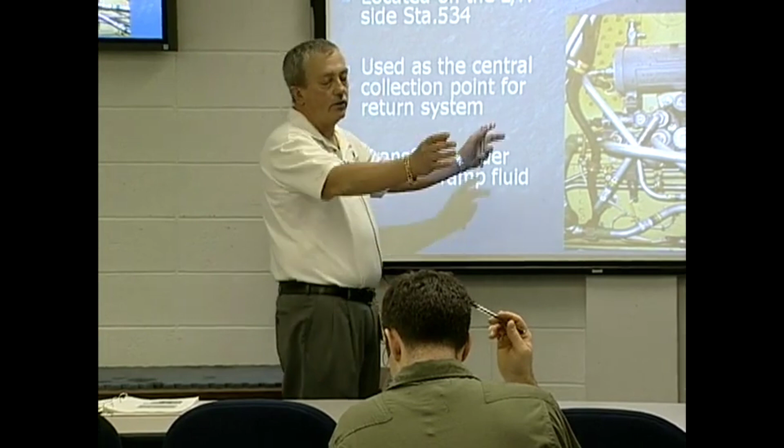It really doesn't hold but about a quart of hydraulic fluid. You'll notice that when you go out and you pre-flight the ramp area, you'll look on either side of the ramp actuating cylinders. They are huge, and they require a lot of hydraulic fluid to operate. When I bring the ramp down, those cylinders need to be full of hydraulic fluid. So this transfer cylinder was put in there to allow us to have a little bit more hydraulic fluid for ramp operations.

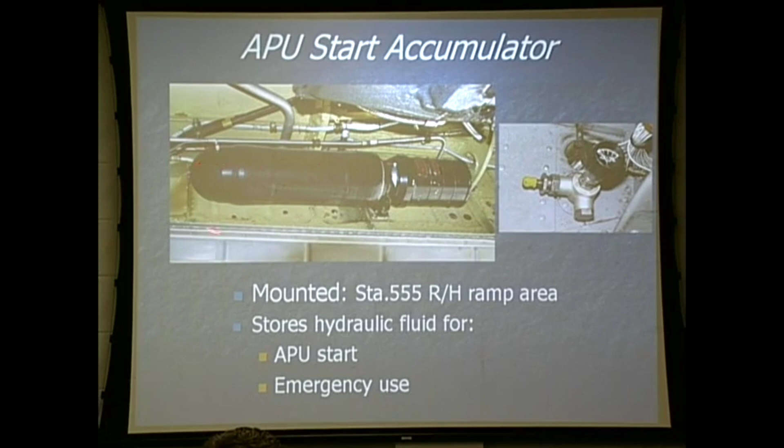Our APU Start Accumulator. It's located at Station 555 in the ramp area. You go out. Underneath the aft transmission, there are 2 panels that fold down and back. This is inside on the number 2 engine side. This stores the hydraulic fluid needed for APU start, the pressure and flight. If I need my APU for an emergency and it does not crank, the pressure 3,000 psi of fluid that I've got stored in there can also be used to operate some of the subsystems during an emergency.

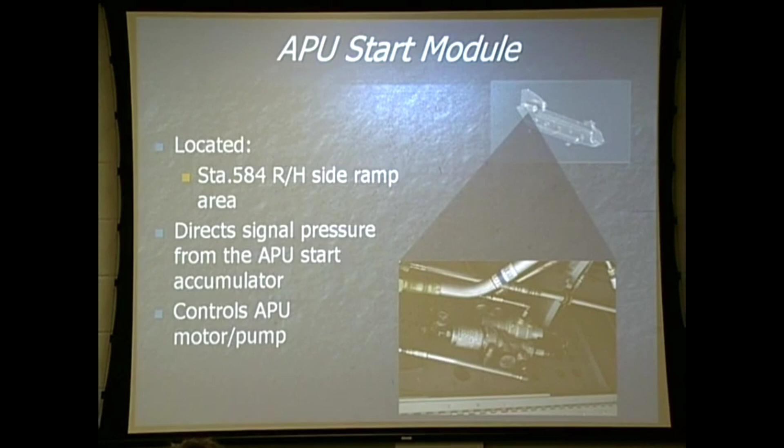APU Start Module, located on the number 2 engine side on the inside of the aircraft, Station 584. This is kind of the governor, the brains that tells that APU motor pump when to be a pump and when to be a motor. It works in conjunction with the little electronic sequencing unit for the APU. The signals tell that motor when to be a pump and when to be a motor.

APU motor pump, located on front of the APU. This produces 3,350 psi of pressure. This is the only pump in the system that will produce that much pressure. We need 3,350 psi to start our engines. Keeping in mind that when we're flying along and I have an engine failure in flight, if I need to restart it, I have to start the APU because it's the only thing that gives me the 3,350 to restart that engine.

Utility hydraulic pump, located on what side of the aft transmission? Number 2 side of the aft transmission. It will produce 3,000 psi of pressure for me. It will constantly produce 3,000 psi of pressure with a variable flow rate of 0 to 16.5 gallons per minute. Again, once we get in flight, there's not any subsystems off the utility system you're going to need. But you want that 3,000 psi of pressure there in case you need it. So it's always there, but just a variable flow rate.

Hand pump. It's a double action pump, meaning every time I pump on it, the pressure is going either way. I'm pushing hydraulic fluid inside that big black accumulator, APU Start Accumulator, with that hand pump. Our fill module, located in the ramp area just a little bit aft of the hand pump. This was not on the Charlie models, B's or C's.

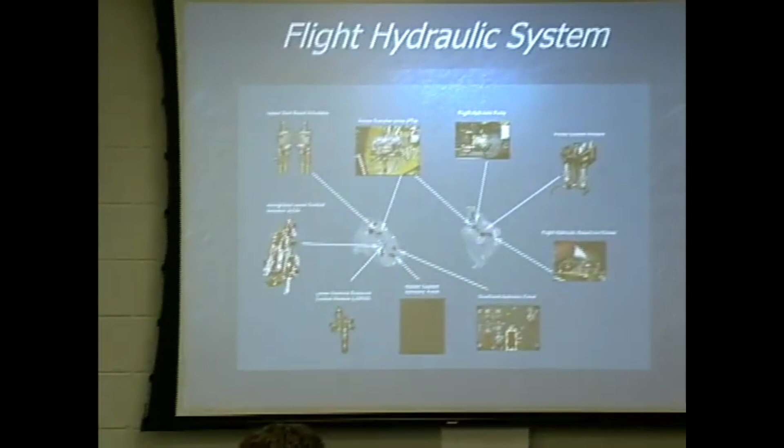Our upper dual boost actuators, no matter what control input we put into the aircraft, whether it be with a cyclic stick, with our pedals, with the thrust, some kind of a movement will go to our upper dual boost actuators. They are mounted up in the forward transmission area and the aft transmission area where there's swash plates. They are two different kinds. There is a swiveling and there is a pivoting actuator.

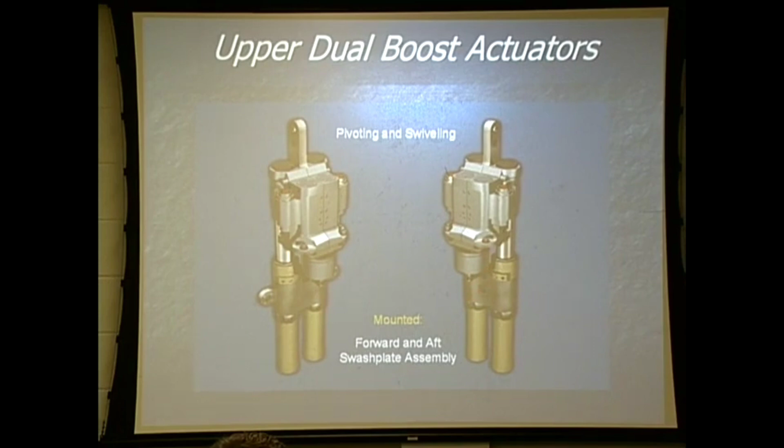The pivoting, if you look at it on one side of it, no matter which way you look at it, one of the ears should form a P for pivoting. Swiveling will have a bolt going through the middle so it can swivel back and forth. One's on the opposite side of the other. They'll counter their pivoting and swiveling movements to prevent any kind of lockup of the swash plate up top.

They have jam indicator buttons on the top of them. You'll be looking for those during pre-flight. They're just like filter buttons. They can be reset, cycle the controls. If they stay in, they're good to go. And they also operate off 3,000 psi of pressure. As you can see, they control the movements of the swash plate. One side of that actuator is the number 1 system, one side is number 2 system. Should a system fail, never fear, that 3,000 psi of pressure on that opposite piston will drive that actuator.

Power transfer units. On the utility side, I have a motor. Once I get the utility APU motor online, it will produce pressure through the back side of this motor, turning another pump, power transfer unit, for our flight controls. I have one in the aft pylon area, one in the forward pylon area, one for the number 1 flight boost system, one for the number 2 flight boost system. When you go out and you crank the aircraft up, you do your flight controls check. These are the pumps that you're using to do your flight controls check.

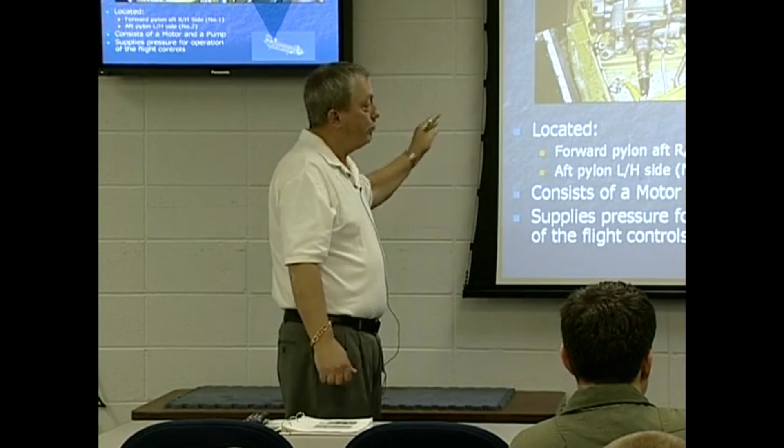These are also backup pumps. If those flight boost pumps fail on the transmissions, then I have 2 more backup pumps. So again, there we go, start talking about redundancy. If I lose all 4 of those flight boost pumps, I shouldn't have got out of bed that morning. I mean, that's a lot of redundancy there.

And the flight control system, we call our control a power control module. What they have done is they have taken the pressure control module and the return control module that we had in the utility system, they've combined them. We do not have all those solenoid valves on top of this one because we can't isolate this system like we could the other system. So they've combined them. Our pressure filter, return filter is there on these. The number 1 is located in the forward pylon area. The number 2 is located in the aft pylon area. They also have filter buttons on them and they have pump fault buttons on them.

This is a good picture to show you the number 1 flight boost system in a nutshell. There is the reservoir for the number 1 flight boost system. From the reservoir during our engine starts, fluid will go to our PTUs, power transfer units. From our power transfer units, it will go to our power control modules and then be distributed out to wherever it needs to go. But our flight control systems do not have a lot of components. They operate a lot of components, but that's pretty much a flight control system in a nutshell.

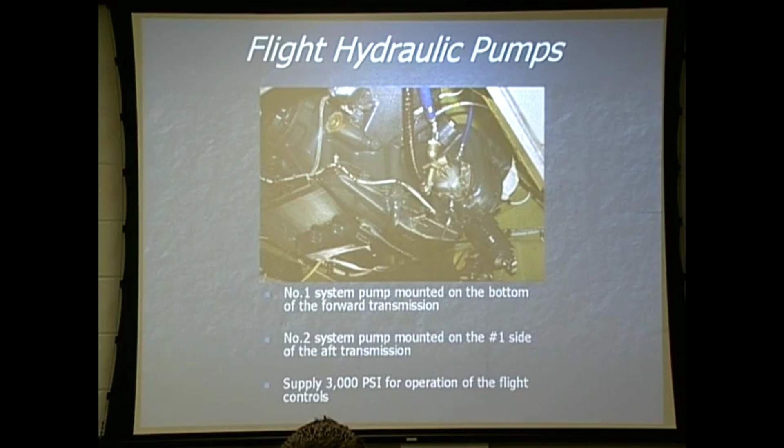If I look them up in the parts manual, they all have the same part number, they have the same stock number. It's just a matter of where they're mounted and what lines are hooked up to them. Our hydraulic panel on the overhead console switch. As you start looking through your dash 10, they're going to refer to something called an isolation switch. There's nothing on that panel called an isolation switch. What they are talking about is once we develop a leak in the utility system, is the ability to isolate something.

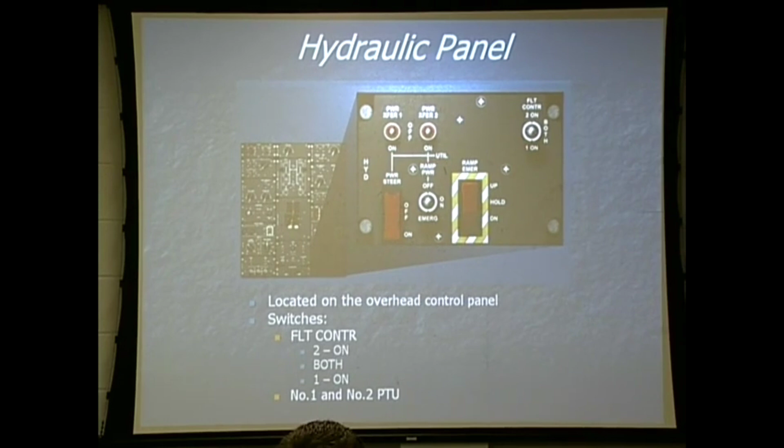If my power steering leaks, I can either flip this switch up and disable the power steering right there, or I can reach down on my center console and just turn off the power steering. Because you're going to find out when we go through class that that one switch right there will actually disable 3 systems. I got power steering, swivel locks, and brakes on this switch. But if I can isolate it just by turning my power steering switch off, I've isolated that system.

I can control the flow of fluid to my ramp. I can turn it off or I can turn it on. My power transfer units, since they operate off of the utility system, if one of those start to leak, I can turn it off. But again, there is nothing on there that's marked isolation switch, just the ability to isolate something. Lower control pressure control module.

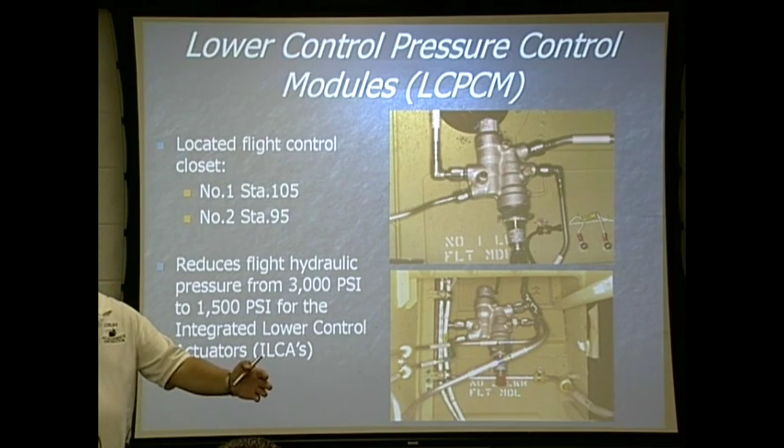When I reach in there and I turn off my AFCS, I am turning off hydraulic pressure at the lower control pressure control module. These are located inside the flight control closet. Also, you're going to find out that everything in the flight control closet operates off 1500 psi. This is where it gets reduced down to the 1500 psi. Upper dual boost actuators, we want 3000 psi. Flight control closet, we want 1500 psi.

Our integrated lower control actuators, our ILCAs, located in the flight control closet. These are what operate off of 1500 psi. There are 2 portions of this. There is a boost side. The boost side of the ILCAs is something that we cannot control the pressure to. We want 1500 psi of pressure going there all the time. When you make a pilot input, that is the hydraulic boost that you get from moving the controls.

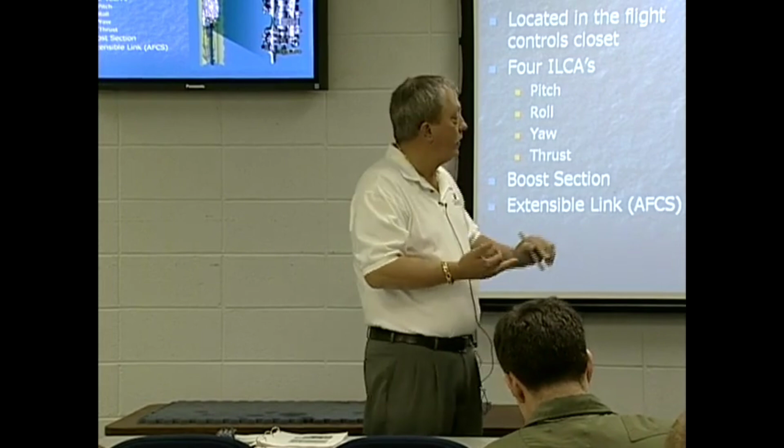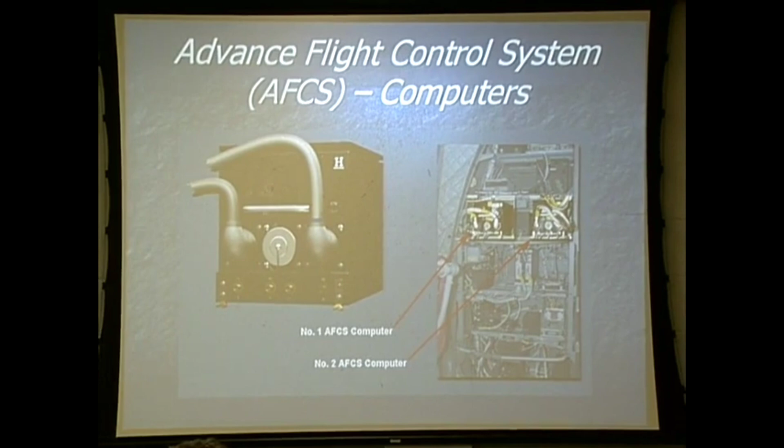The extensible link side is our AFCS side. In our pitch, our roll, and our yaw, we have an extensible link. That is where the AFCS inputs go to. Anything that's introduced to the aircraft input-wise other than a pilot input, it's trying to dampen those out. But we have 2 AFCS computers inside their avionics compartment, identical in operation. So that tells us we've got 2 separate systems. I can lose one system and it should not affect the other systems.

Some of the things that it does for us is pitch attitude hold, bank angle hold. When I go into a bank turn, pick out the bank angle I want and I can hold it there. And it's going to continue to go in that little circle that I've just put it in all day long until I either run out of gas or I pull it back up. It will not continue to roll over.

Heading hold. From the time I pick this aircraft up to a hover, it is going to hold the heading for you. As long as my swivels are locked, it will hold the heading. Airspeed hold, altitude hold, and motion dampening. Those are things that it does for you. This is Cadillac. It's almost fully coupled.

AFCS, again, some of the things that are in there. We've got a DASH actuator in the pitch system that provides for pitch attitude stability, airspeed hold, and a positive stick gradient, meaning helping us that whenever we nose this thing over, try to get 160 knots out of it, the LCTs, the dash actuator, are all going to work in conjunction, level that fuselage back out for me, but it's still going to hold it at 160 knots for me.

Our HSI, we were talking about that, the heading hold and some of the features that it has. Once we get our aircraft set up and we've got straight and level flight, if I need to change the heading, I find my little heading bug, I grab the little heading selector knob there on the bottom, I turn it, and the aircraft's going to start turning to wherever I turn my heading bug. Once you get this aircraft set up with AFCS and you start your flights, it's pretty much I can kick back and read a newspaper. But we all know we've got to keep our hands on the controls and watch what's going on out there. But it is set up with AFCS to do a lot of the things for you.